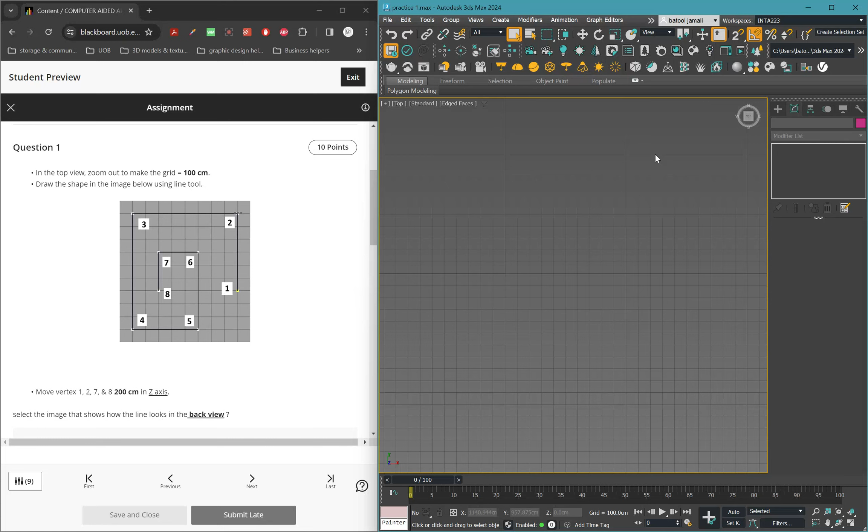Now I can use these squares to draw this drawing. So draw the shape in the image below using line tool, which means I will go to create and then shapes, spline, and I will have line tool here. I will select it and I will start counting the squares that I have. So here I have 1, 2, 3, 4, 5, 6. I'll start and you will follow the same order of the vertices.

So I will start by opening a snap, S to activate snap. It is a snap 2. I am in the top view. So now I'll start 3, 4, 5, 6 and then click. Then I will go to the third point. So 1, 2, 3, 4, 5, 6, 7, 8. So I'll do the same thing here. 3, 6, and 8. So I'll click here and then I'll go down and then I'll come to this side again.

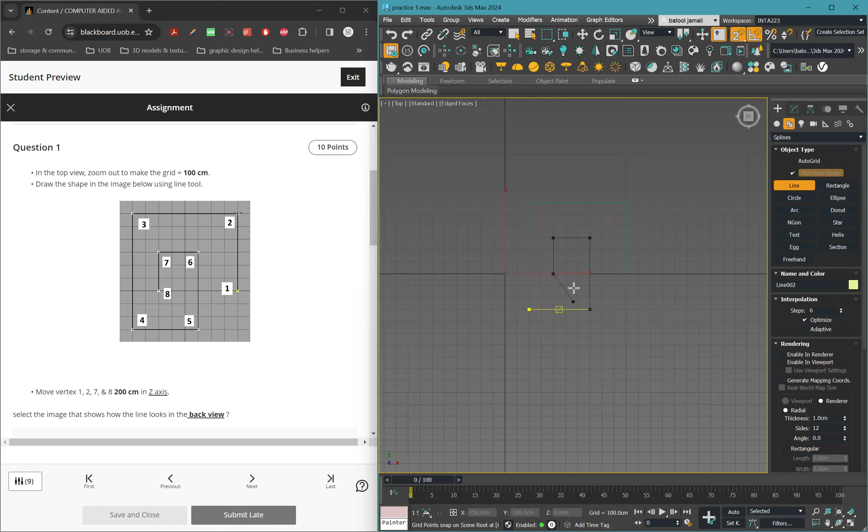If you did anything by mistake, for example, I closed the line by mistake, then you will have to fix it. It will not show how to do this in the question itself. So in case you did this, I will open line using snap and I will continue working. So 1, 2, 3, 4, 5, and then I'll go up to here, here, and then come down here. Right click to close the line, S to close the snap because I don't need it anymore. Right click to close this command.

Select the first line you've done and then go to attach. This is because I drew them in two separate lines. I'm supposed to do this in one line. So I will click on attach the second line, and then I will go to vertex, select the two vertices, the end of the first line and the beginning of the second line, and then go to fuse and weld. So it will turn it into one vertex.

Now make sure all the vertices are corner vertices, because the welded vertex will always be a corner bezier. So right click on it and make sure to change all the vertices back to corner. Now you don't need to do all these steps if you've already done it all as one line from the beginning.

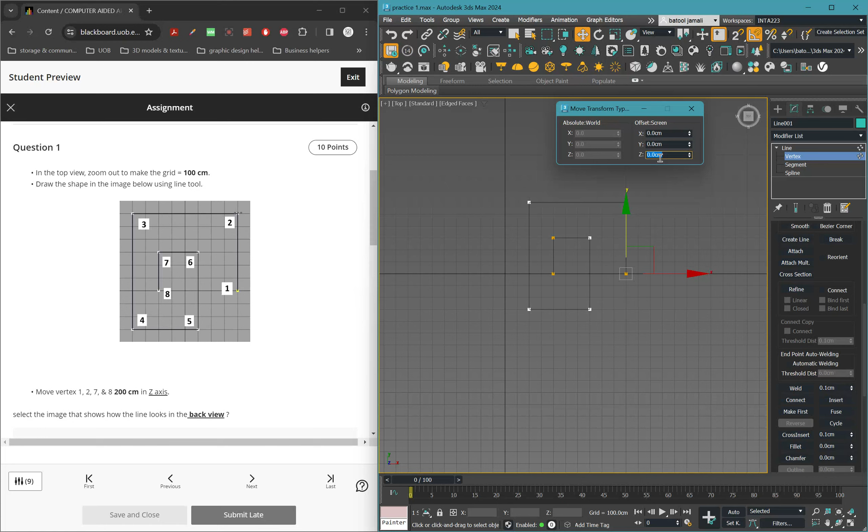Okay. Now the next point says move vertex 1, 2, 7, and 8 200 centimeters in the z-axis. So I will select vertex 1 and 2, Control, and 7 and 8. Right click on move to get this window or F12 to open it. And then I'll type in the z-axis 200 centimeters and enter. So now you will not see any changes, but they already moved up. Okay.

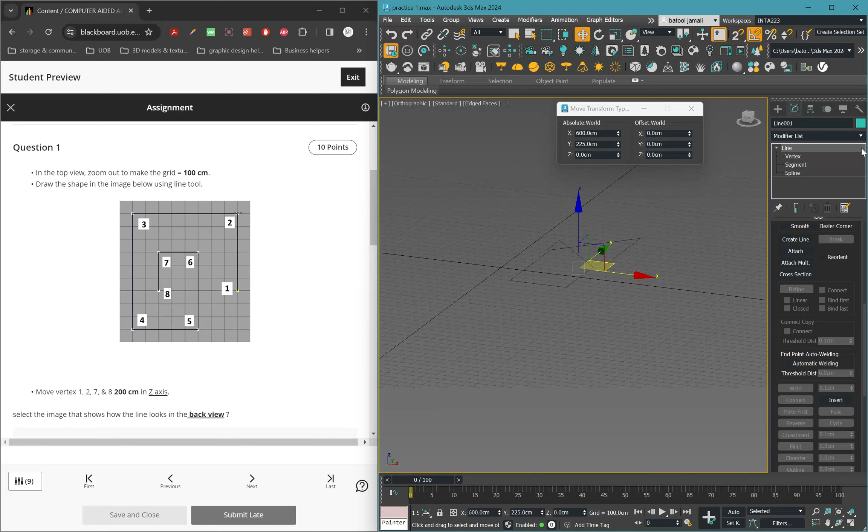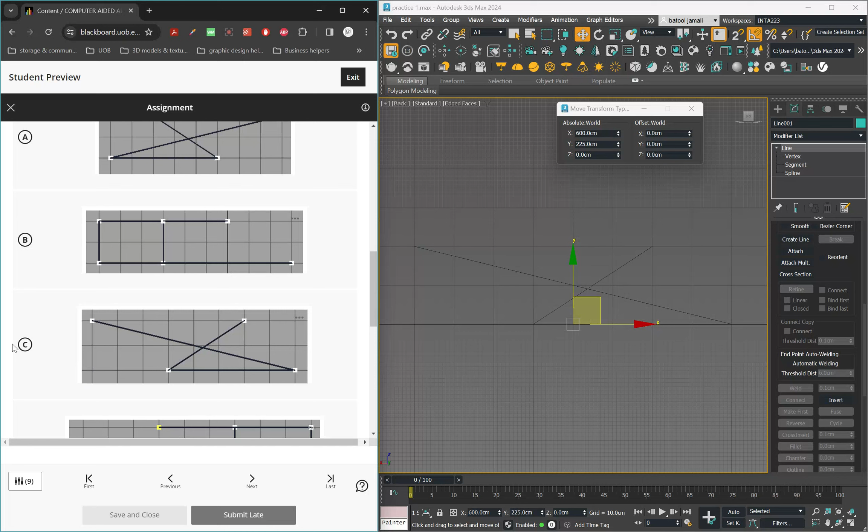Okay, I'm done with all the steps. Don't forget to go back to line to close all the levels or the sub-levels. You should not have anything open on this side. Now it says select the image that shows how the line looks in the back view. So I'll change the view to back, Z to zoom on everything. I still am in the back view. So I will select the image that shows how it looks, which is this one. So I'll select C and I will check if there are any other questions.

Yes, I have another question on the same page. So I will go to the top view, and then it says go to the top view. Then in the vertex level, connect vertex 1 and 8. So I'll go to connect and connect these two together. So I'll drag from one vertex to the second one. That's it. Now they are connected together.

Now it says fillet all vertices. Now to select all vertices, you can either create a selection this way or Control A. Control A will select everything in your file, or in this case, all the vertices in this line. So I'll go to fillet and I will type 100 centimeters and enter. It will change the fillet value for all the vertices.

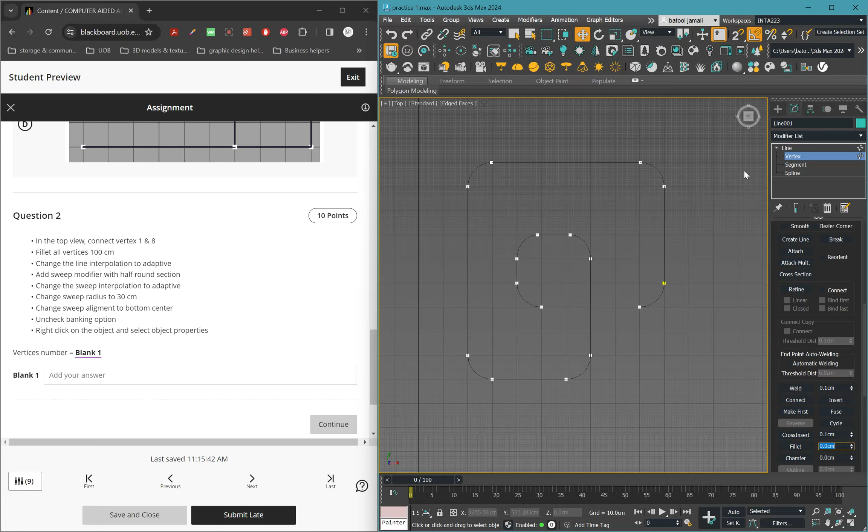Then change the line interpolation to adaptive. So I'll have to close this line, go up to the interpolation rollout and check adaptive. This option is going to make your line smoother and you will need it for the next step.

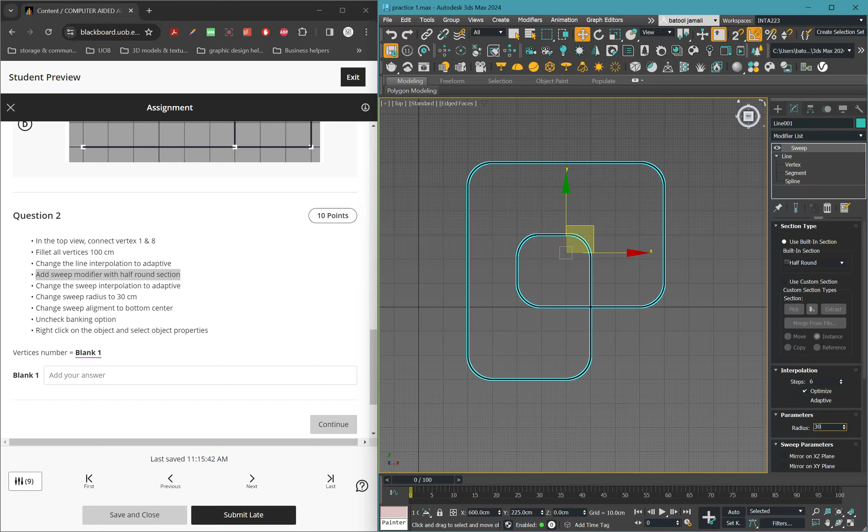Then it says add sweep modifier with half round section. So I will go here, add sweep, and then I will change the section here from the built-in sections, the ready ones, to half round. Then I will change the sweep radius to 30 centimeters and the interpolation to adaptive. So change the sweep interpolation to adaptive, the radius to 30 centimeters, change sweep alignment to bottom center.

So you will find the sweep alignment down here. You need to select which side. It says bottom and then it says center. So I'll select this and then I will uncheck banking option. So this is the final result that I have.

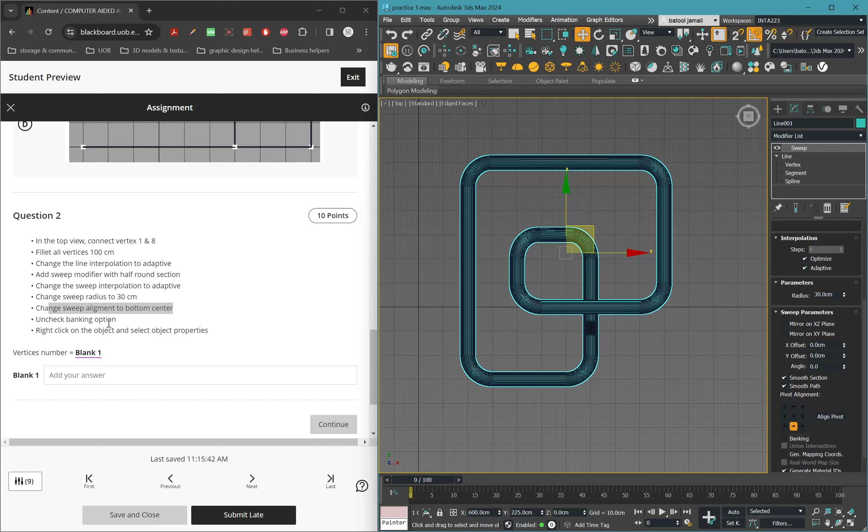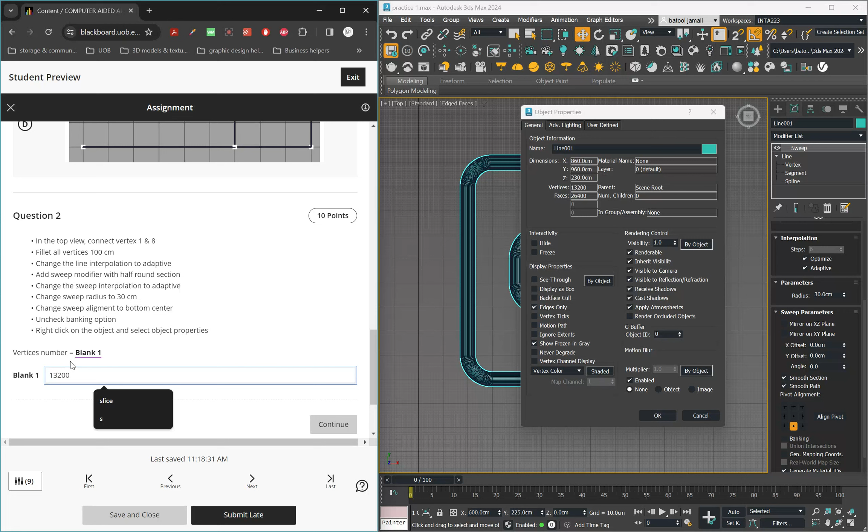Now it says right-click on the object and select object properties. Right-click, object properties, and then what is the vertices number. So in the object properties, we have the dimension in X, Y, and Z axis. We have the vertices number and the face number. We need this number, so I will just type it, 13200. And whenever you are typing anything, make sure that you have exactly the same number, otherwise you are going to lose your grade.

That's it for this question. Now I will move to the next one.